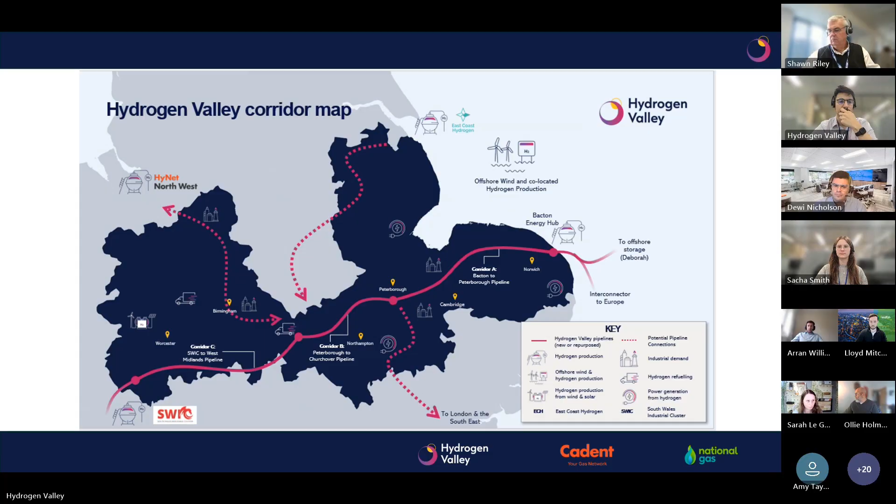We also talked about where the hydrogen might come from, and there's multiple options on the table as we look further down the line. Of course, one of those will be the Bacton Hub via Project Union. And it'd be great to hear from Richard and Iona on that a little bit later on.

But I think it's also worth bearing in mind the neighbouring hydrogen projects that are taking place. If you're at the East Midlands Hydrogen Summit last week, then you'd already know this. But for those that weren't, there's now an updated East Coast hydrogen pipeline route. And what that now looks like is bringing hydrogen further south into the Midlands at an accelerated timeline.

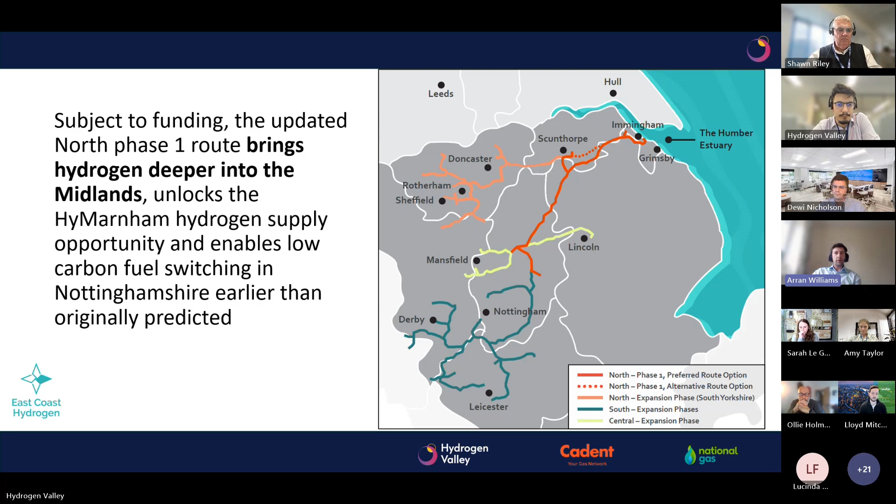I think for us in the Hydrogen Valley area, that's a really exciting development. The closer the hydrogen infrastructure gets to us, the more tangible I think potential future extensions, etc., start to feel. So that's where we're at in a nutshell. Happy to answer any questions in the chat or in the breakout rooms later on that. But for now, I will hand over to Amy for a comms update.

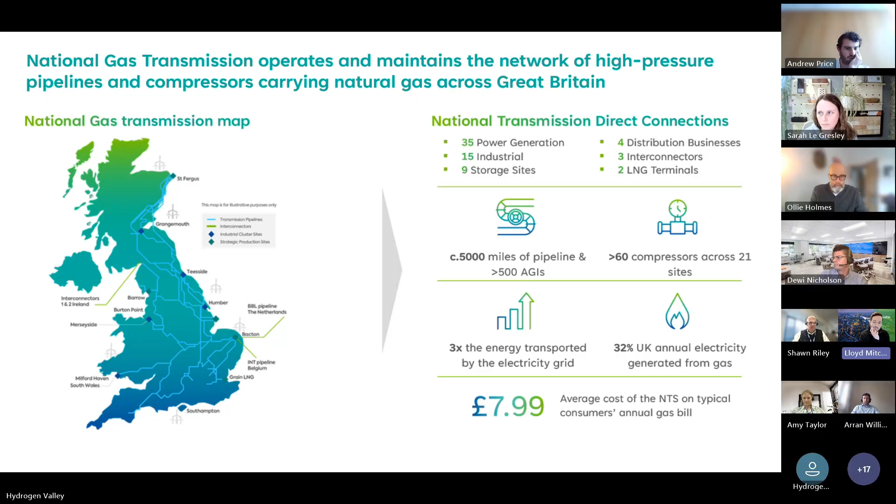you probably will have heard talk of this before, but as National Gas, we are taking a 3-molecule approach to decarbonising our system. We're looking at hydrogen blending, primarily to try and increase the amount of hydrogen supply available to de-risk investments for hydrogen producers, so they've always got somewhere to send the hydrogen. We are looking at 100% hydrogen pipelines, so Project Union and East Coast, which I'm sure you're all well aware of, converting sections of the network or building new where necessary, whilst maintaining resilience in the existing natural gas system. We're also looking at CO2, where certain parts of the network can transition to CO2 to help support industrial carbon capture. Particularly, we're looking at whether we can convert one of the feeders up in North Scotland to take industrial emissions from the industrial belt in Scotland up to St Fergus and out to be stored in the North Sea. So that's the high level of what we're looking at as an organisation in terms of supporting decarbonisation. If you go to the next slide, please.

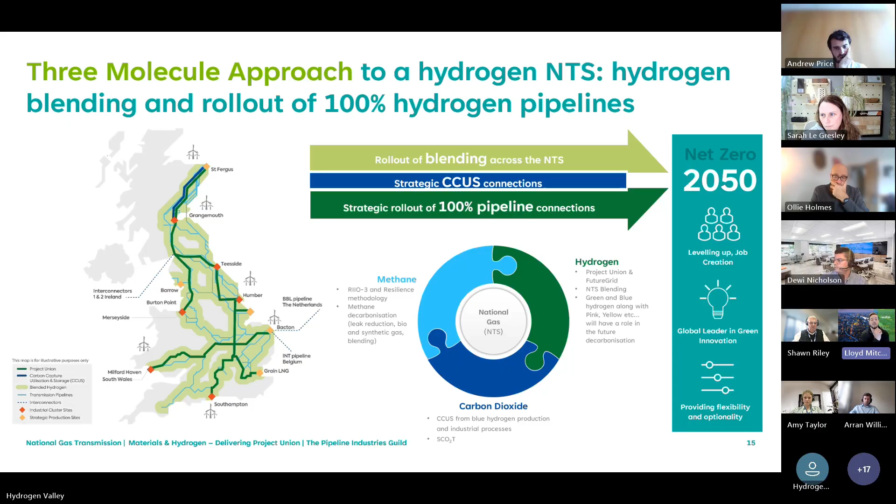So in order to achieve that, we needed to be certain that we were able to operate a hydrogen pipeline system, whether that's repurposed or new. We've mostly focused our research work on repurposing existing pipelines. To that end, we built the FutureGrid Hydrogen Test Facility, up in Spadeadam in Cumbria, to understand the capability of the existing system to transport hydrogen. All of the assets on that site have seen service across the network, 10, 20, 30 years, and that's a really useful test bed. We tested it with hydrogen at 2, 5, 20, 100%, and got really good results showing that our system is capable of transporting hydrogen, which is obviously good news.

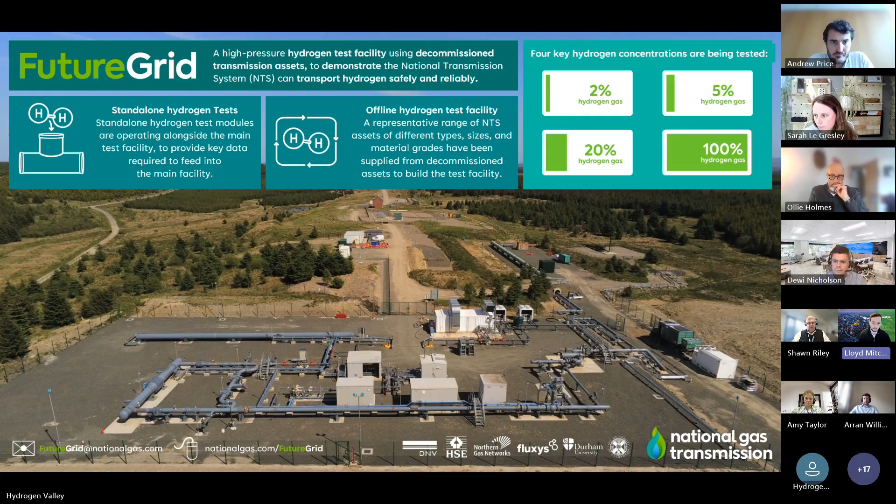So if we move on to the next slide, which gets more into the meat of what I'm talking about, we wanted to develop that further. We got really good evidence around the capability of the system to transport hydrogen, but we wanted to understand the specific use cases. At the moment we're focused on power users, and we've had lots of conversations with power stations about transitioning to hydrogen. We're also focused on large industrial users, and likewise we've had a lot of conversations with them.

But one area we hadn't really explored previously was hydrogen for transport, which is a pretty nascent industry as it stands. There's not really much development here, mainly because there's just not the hydrogen capacity in the UK at the moment. We actually had on loan a Vauxhall Vivaro hydrogen vehicle, and it was quite an experience trying to get that around the country. We wanted to take it to a few different sites, but almost all of the hydrogen refueling stations in the country are out of operation.

Because there's a perennial chicken and egg problem. You have that in the wider hydrogen industry, but I think it's particularly acute in hydrogen transport, in that there are no major users of hydrogen vehicles because there's no significant access to hydrogen to supply the vehicles, but there's no investment in access to hydrogen because there's no demand for it. It's probably a problem you're familiar with, but the hydrogen transport industry has really been suffering with this. One reason for that is it's very difficult to transport hydrogen. Whereas you might have one or two deliveries a week with petrol and diesel to a filling station at the moment, you'd be looking at 10 tankers a day to transport the equivalent amount of hydrogen because it's so light, and that's obviously not practical.

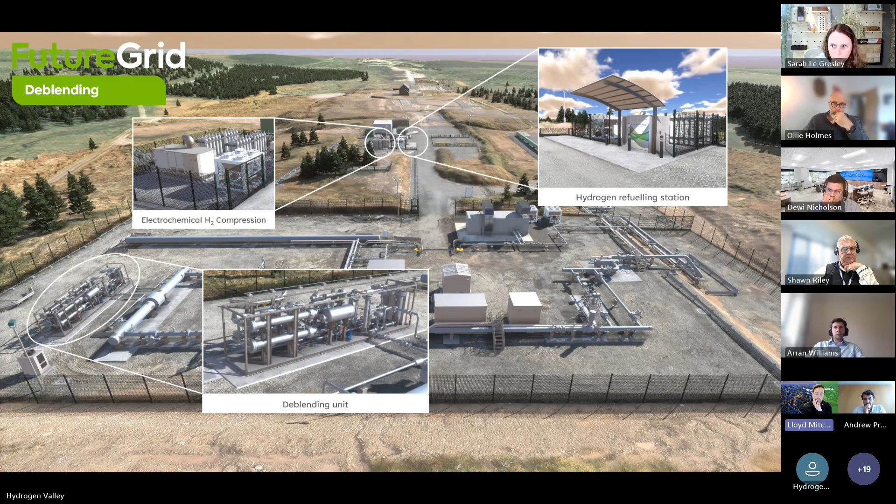So that's the concept. If we move on to the next slide, this breaks that down in a little more detail. You can see you've got the bulk separation system that takes the hydrogen out - in this case, we've got a 200 kg a day system. And the second system, as I said, purification, compression, and then the refueling station.

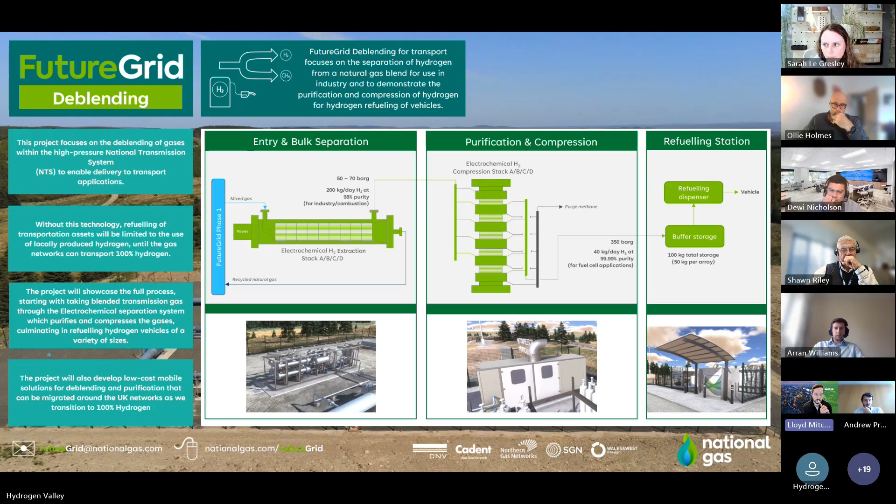We focused on heavy transport. Electrification of cars is well on its way, so we don't see much of a role for hydrogen in passenger vehicles, but electrification of heavier vehicles is more difficult. So we're focusing our efforts on the heavier end of the transport spectrum, things like HGVs, freight rail, potentially aviation, but that's on a much longer time horizon, and maritime as well.

So we wanted to look at how that potential demand mapped across our network, and we developed a rollout strategy that lays that out in quite a lot of detail, which is publicly available if you wanted to have a look at that.

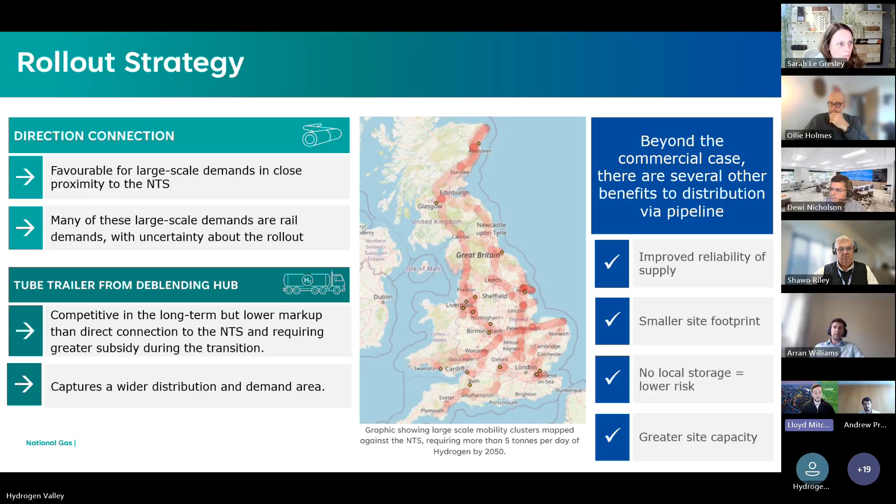This is just to say that we worked with a huge number of stakeholders on this piece of work. A lot of the feedback we got from transport operators and refueling station operators is that they want this system yesterday. Unfortunately, it is dependent on the rollout of hydrogen networks more broadly, which obviously you guys are involved with, and so unfortunately we can't provide this in the timescales they want. But I think it's definitely a concept worth developing for the future development of hydrogen and to support future decarbonisation of transport.

So we've had a lot of interested organisations across different sectors. That includes vehicle OEMs - we've got JCB coming up to the site in a few weeks, and in fact they've developed their own hydrogen digger. Non-road mobile machinery is one we've been looking at quite closely because that's very difficult to electrify. Aviation and rail, we've had lots of research organisations interested, and there are quite a lot of businesses involved in the refueling and hydrogen production space.

A lot of them have been in quite a tough time recently, I'd say. I think the winds keep shifting within hydrogen transport, particularly with Trump getting into power in the US, which stymied some of the investment that was going on in the area.

But anyway, that is to say we've developed this concept. We're currently in the phase of building out that test facility and getting all the equipment on there, and simultaneously we're looking in more detail at that rollout strategy and looking at the commercialization - what would this look like in a commercial sense, who owns the equipment, what kind of scale would you need for this to be viable, things like that. And the project is looking to finish probably around the end of next year.

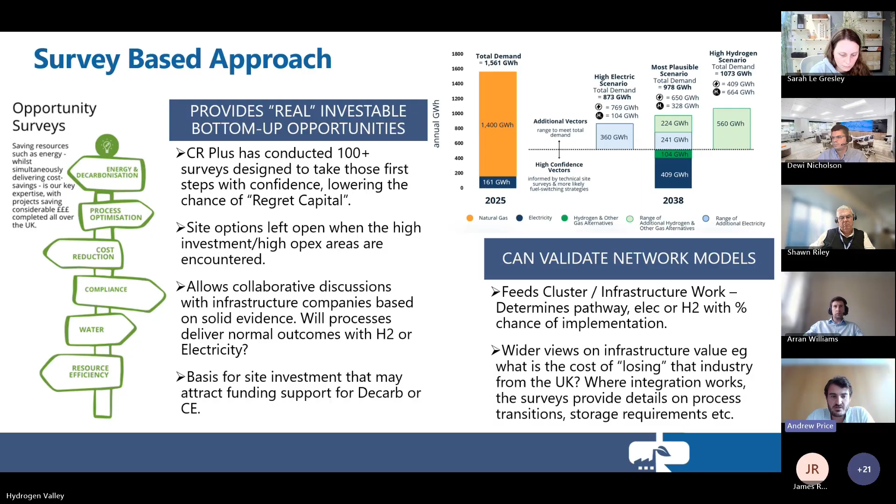So those surveys create the opportunities, and how do you turn those opportunities into real projects? Well, in this case, there's an example of the steelworks in Cardiff where we helped get the funding required, the capex, to convert one of the reheat furnaces to hydrogen, supported by detailed engineering.

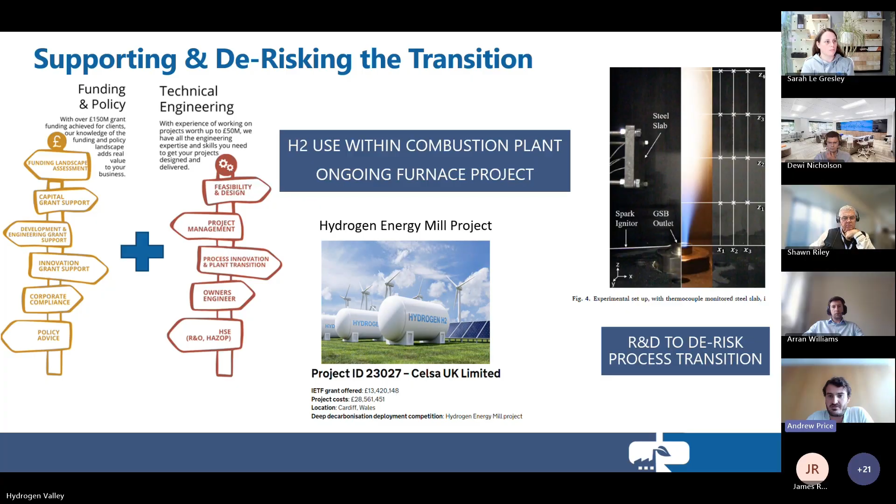That's for a hydrogen fuel switch for combustion plant, and we support a PhD student who's just finished his PhD a couple of weeks ago and will be joining us shortly to de-risk the process change of hydrogen combustion. If you just move on to the next slide—so that's Ben, who's going to be joining us in a few weeks.

His PhD was actually based on the steelworks project, understanding what some of the challenges and risk areas might be in terms of the impact of changing fuel composition on heat transfer, and essentially on product quality, which is the ultimate thing you want to make sure you keep as it should be.

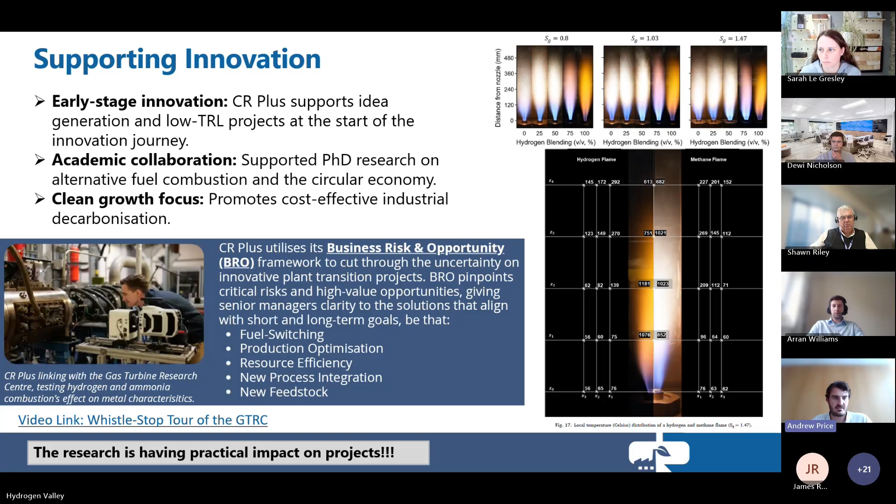If you just move on to the next slide—yeah, so that's pretty much the end of the PowerPoint. I just wanted to give a little bit on some of the work we've been doing and are still doing in the Black Country, as well as other regions, and then how some of those projects, especially in fuel switching, can then access funding.

One of the conversations we had in the breakout room—I'll shut up in a sec—was about where is that support for businesses now. That's one of the biggest barriers. The likes of IETF is no longer there.

So hopefully we'll see something a bit more positive shortly in terms of funding for the end users who are going to be the key off-takers for this fuel switch. Because at the moment there's very little certainty, and it's hard to invest whether you're an off-taker, the generator, or the network in the middle. There's not a lot of certainty at the moment. And that's all—thanks.

No, completely agree with a lot of your points there, Andrew. I think that was really interesting. And that approach—I think we're completely aligned as far as collating the requirements and then ultimately looking at what those different decarbonisation pathways are. We recognise there isn't going to be a one size fits all, so I think we've got to be pragmatic about all the solutions on the table. Any questions for Andrew before we move on? Great, okay, thank you, thank you.

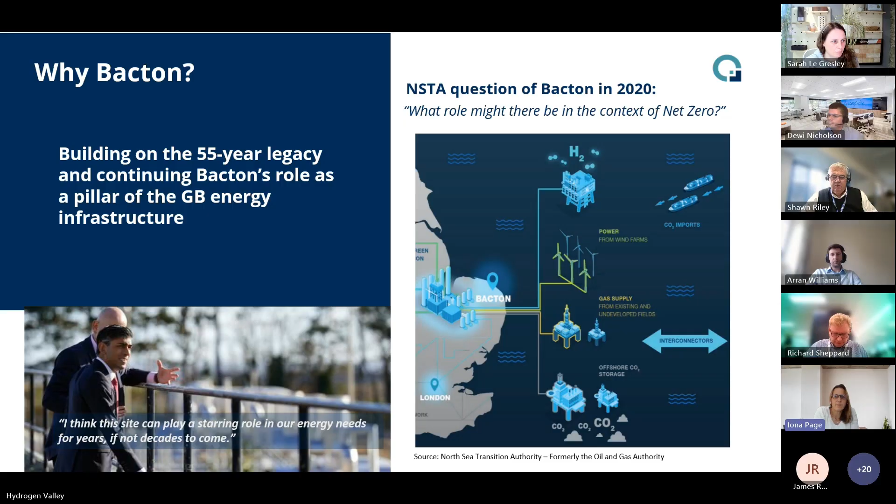We've had the original work looked at around 300 megawatts HHV capacity. Through our discussions across the region, we've actually increased that to a 600 megawatt facility. So that's the intent there, against that kind of data sheet in terms of development. We can move to the next slide, please, Alan.

Who is actually going to utilise that hydrogen? Where is that CO2 going to be transported and stored? And how do we make that work from a money perspective, really working on that certainty from a government support package. At the moment, the CCS-enabled blue hydrogen projects all fall under this cluster approach, and we need certainty over the next year to really understand from a government standpoint how to access those business models as we move from a cluster to more of a portfolio approach.

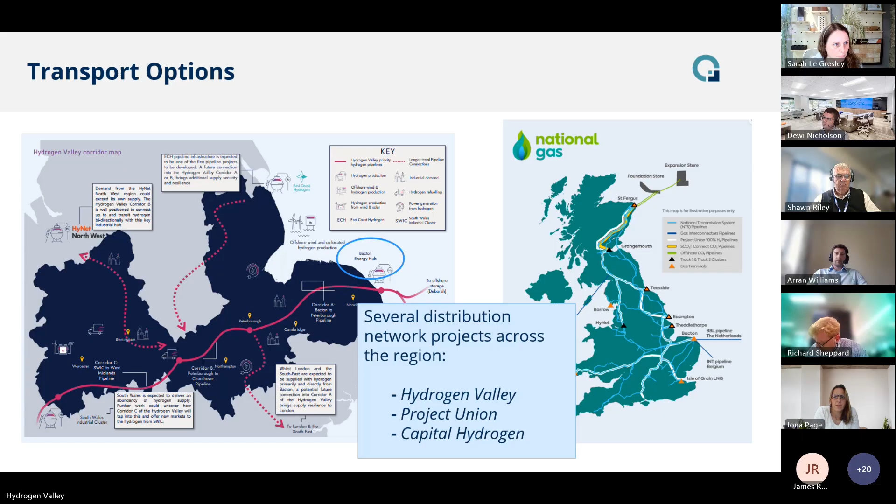So as I mentioned, we need to really be focusing on demand. We have a number of key clusters of demand, one being the Bacton terminal - how do they potentially look to decarbonise, and what's the hydrogen option for them? We have the evolving Fenlands cluster, which we're working on with CR+, working with a number of smaller industrial off-takers who may be able to use hydrogen to decarbonise. We're also working in synergy with Hydrogen East, who are looking at wider opportunities from a hydrogen standpoint, and then today from a Hydrogen Valley standpoint. So we're evolving that demand and creating certainty, looking at that full chain offering across the value chain. I'll hand now over to Richard to go into some of the more granular details from the project standpoint.

Thanks, Iona. To put it into context in terms of our JV, I think we speak nearly every day. As a JV partnership, that's Iona and I, we run a very tight project between us in terms of delivering this between Seal and Progressive. To date, it's proving to be a very successful JV. We're also dealing closely with CR+ for potential formation of a cluster - what we've coined the Fenlands cluster - a burgeoning cluster of industrial demand leaning more and more towards hydrogen, also for the hydrogen to power market, which is going to be part of what I'm going to talk about. Next slide, please.

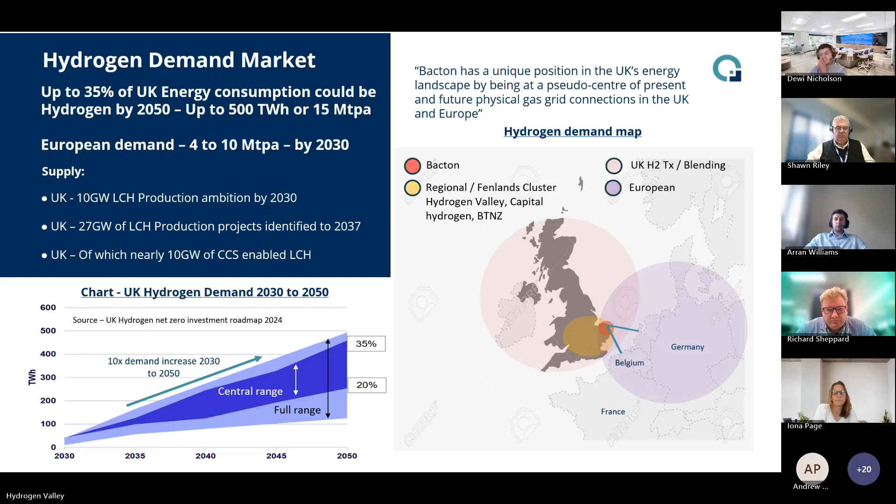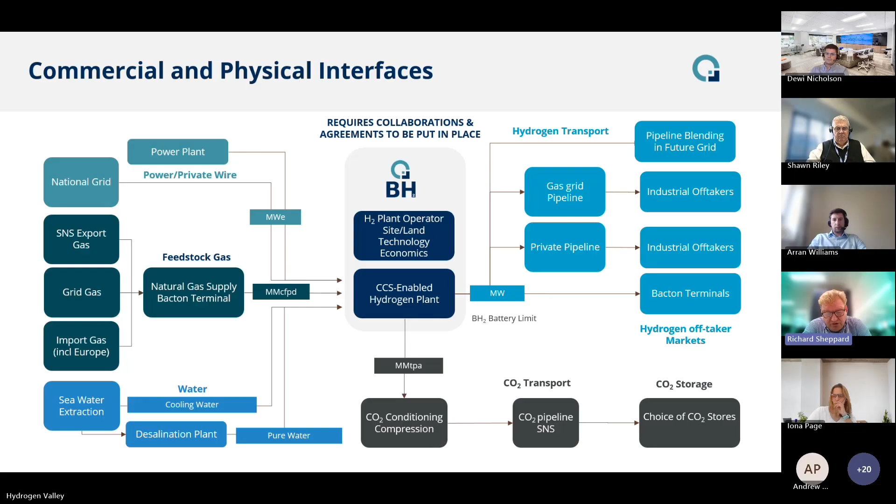So the better the value chain and the more bang for buck we can offer the government, and the more hydrogen offtake we can demonstrate, and the more decarbonisation we can do, the more likely we are to be allocated a revenue support model by the government as they evolve. That ultimately leads to the government being able to supply business models to us, which creates a market, and then allows us to get money from our investors in order to make a return, which is ultimately what we all need to do.

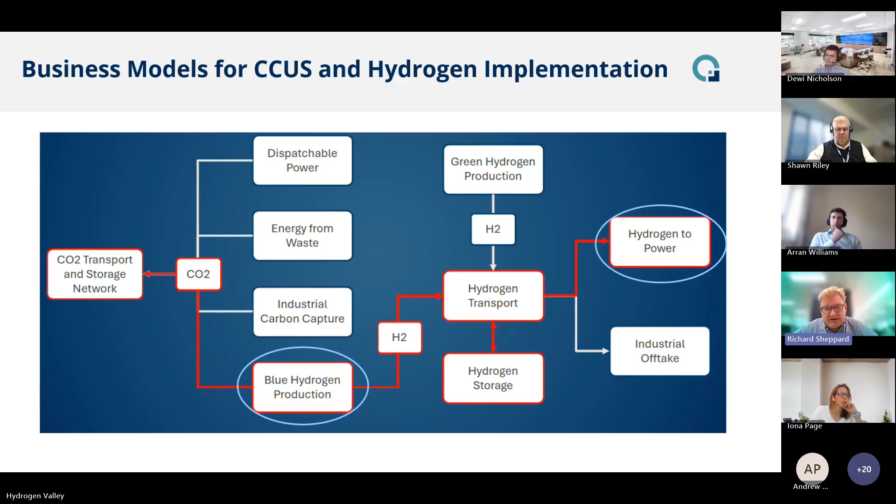Typically 3 years as a stretch target to get a DCO in place, take final investment decision, and then we've got to build and commission the plant to commence commercial operations somewhere around 2031-32, a timeline commensurate with the readiness of a hydrogen demand market. But we'll see how that demand market is influenced by the business models coming along next year.

On transport, on storage, and also on hydrogen to power. Next slide, please. This is touching on something that's going to be affecting not only us, based in Norfolk, but would be true for any cluster, whether it be Wales, Black Country, Hydrogen Valley, wherever it might be, and the number of benefits that we're bringing.

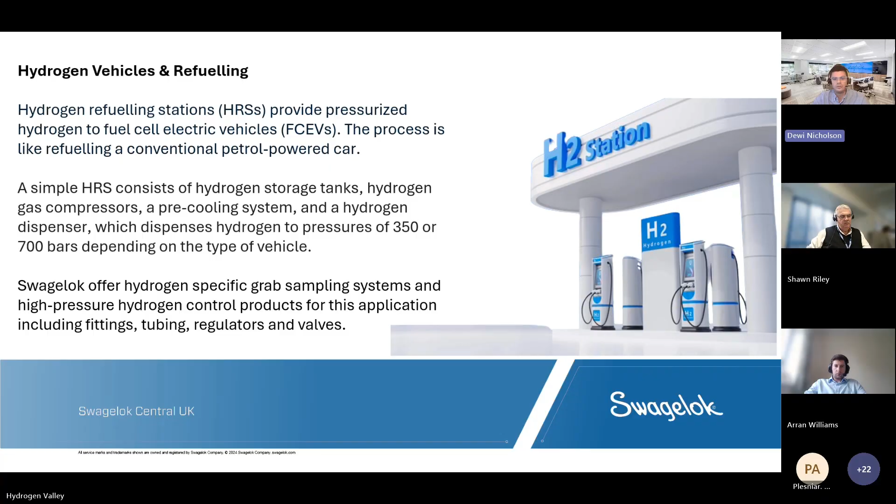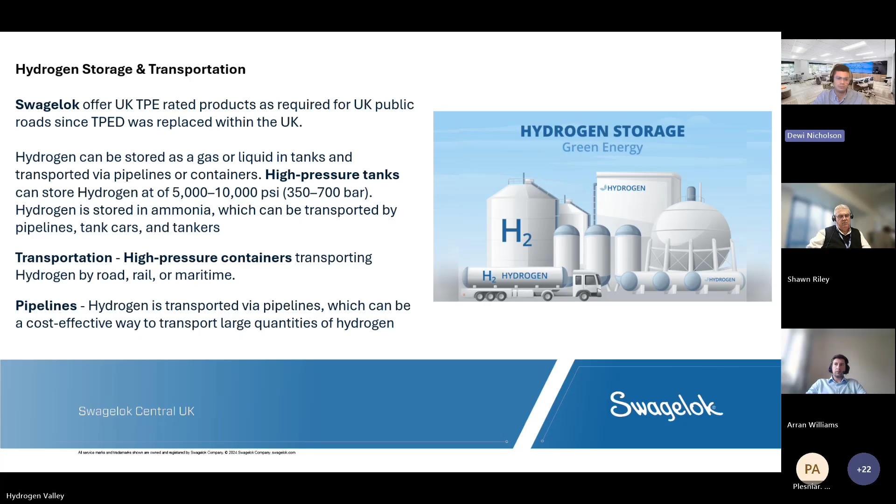Hydrogen blending is quite a hot topic at the moment since the FutureGrid hydrogen trial. The gas utility networks within the UK are looking into this. National Gas have just successfully completed their FutureGrid hydrogen blending trial, where 2% hydrogen was blended in with natural gas to prove the concept of hydrogen blending at this level.

It's an interesting market, especially with this test going ahead and being successful, and with the government currently looking at the blending ratios with a 2% ratio, where previously there was talk about higher blending capacities, which we still hope will be the case in future.

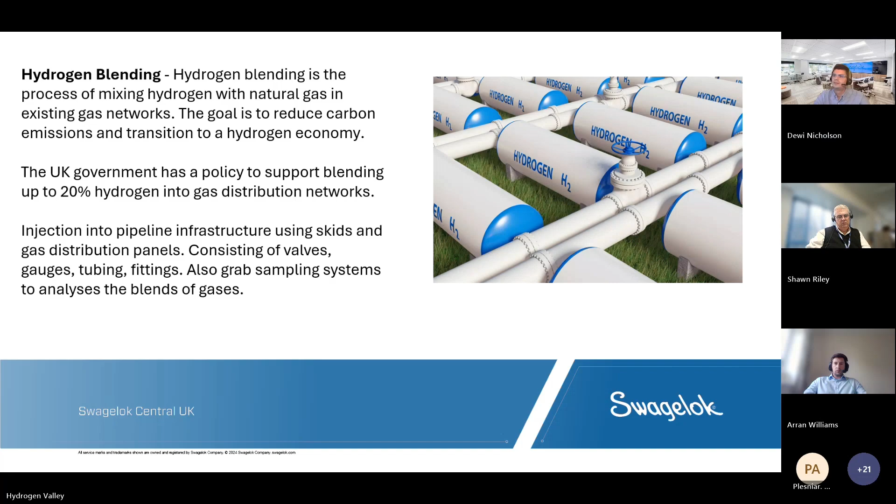They all have their pros and cons, which is why it's a very interesting and fast moving market for us, because we're seeing a lot of companies coming out with different technologies, building pilot plants, and even going into full production, as you will have heard in the news recently.

Again, purity and efficiency is a key metric for electrolyzers, so leak-free solutions are critical for use here. One place where we've come into our own in terms of small bore fluid systems is with our technical and local assistance. We've been able to work with some of the major electrolyzer manufacturers within the UK, offering P&ID reviews and design recommendations, not just due to savings in reducing the amount of components, but also to reduce their system footprint, as this is a key strategy for system manufacturers currently in the electrolyzer industry.

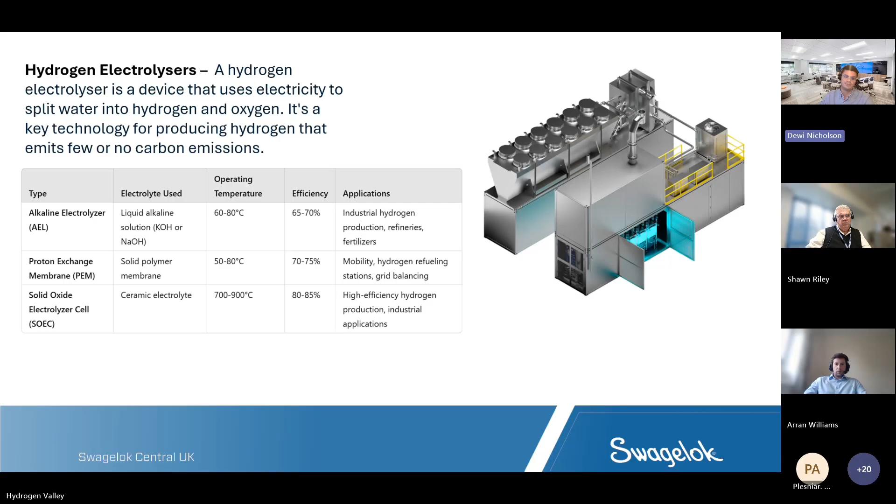So in summary, we work across many different markets within the hydrogen and clean energy sector. We've seen global growth across these markets, which has given us a bit of a success story, and we've been able to invest further in local hydrogen skills. We've got field engineering teams who can come to your site or work with you remotely via Teams to look through designs and improve, or give an opinion on these. And globally, we've been able to employ market leaders who work in the States or in other countries due to where we're based, who can assist you at a higher level within these markets.